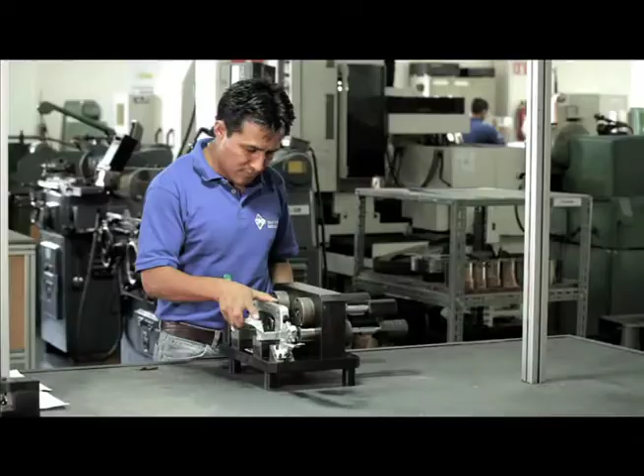Quality, service, experience, technology, flexibility, commitment. These are the values that define CPQ.

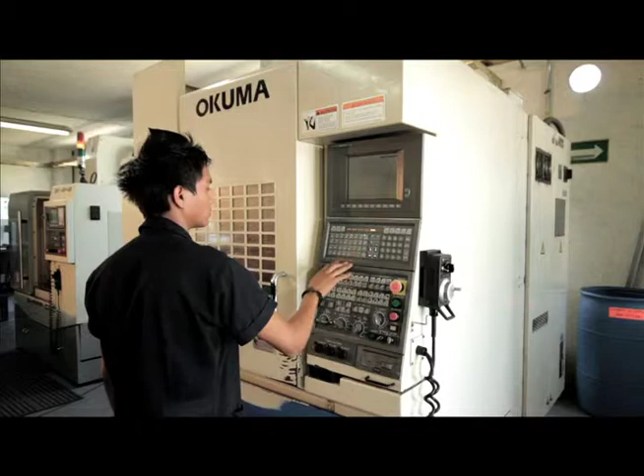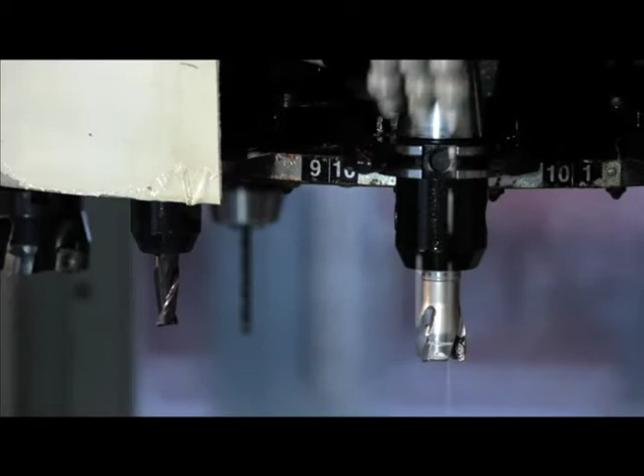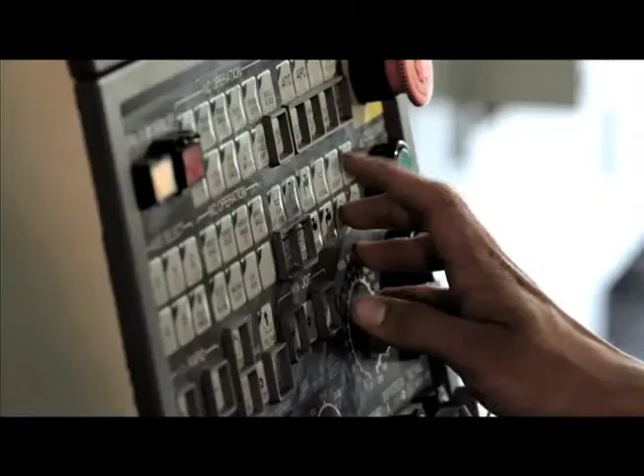CPQ is specialized in high-precision machining for 40 years and offers manufacturing of checking fixtures, holding fixtures, and go/no-go gauges right here in Mexico. With manufacturing and measurement equipment of the highest tolerance, CPQ offers manufacturing solutions, modification, and unprecedented refurbishing of measurement devices for the following industries: automotive, aeronautical and aerospace, pharmaceutical, plastic injection, foundry, molds, stamping, and many more.

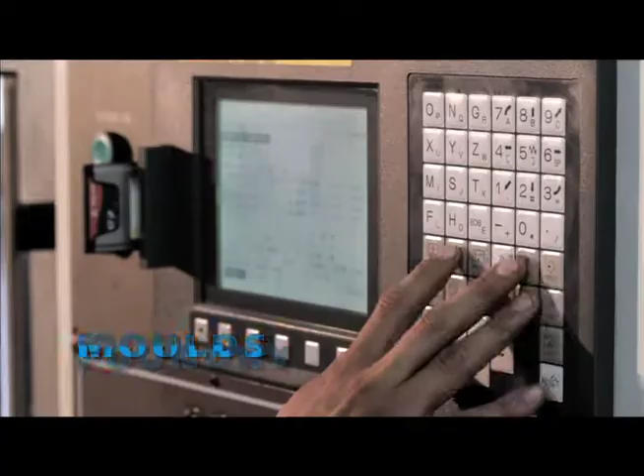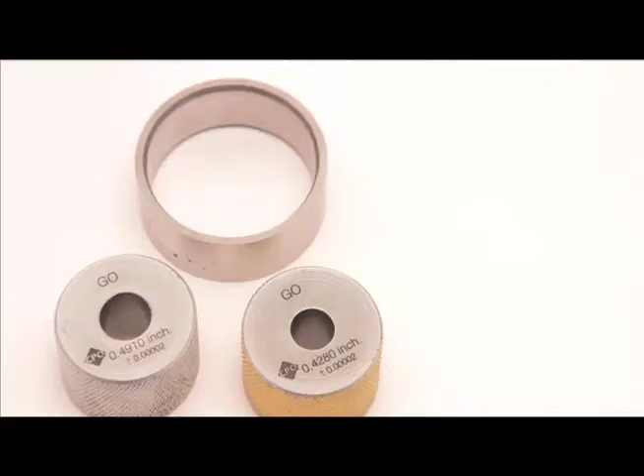At CPQ, using German technology, we specialize in the manufacturing and recovery of measurement equipment for the verification of geometric tolerances in checking fixtures using attribute and/or variables measurements, pin and ring go/no-go gauges, master gauges, fork, slot, and thread gauges, flush pins, height gauges, etc.

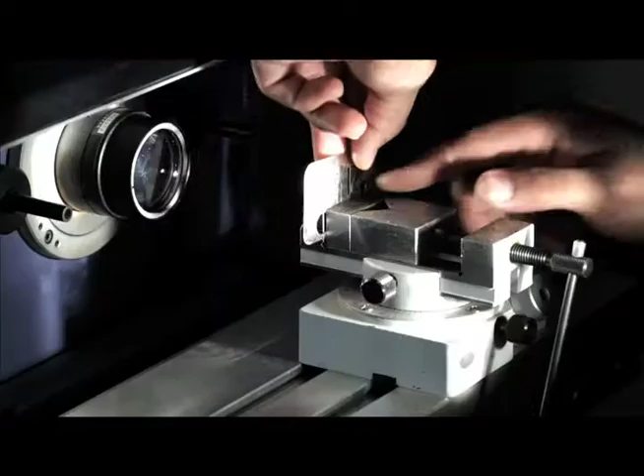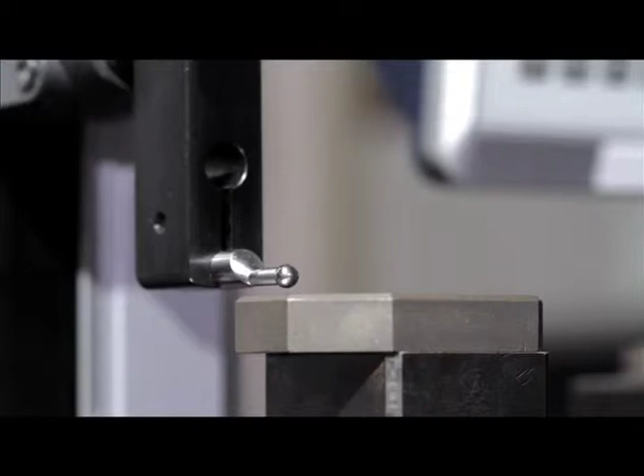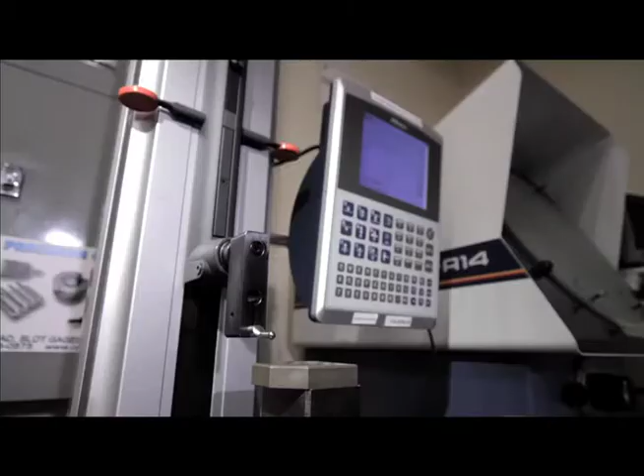The benefits of verifying geometric tolerances using dedicated measuring devices are reliability and speedy measurements, reproducibility and repeatability, independent of the evaluator, robust Poka yoke concept, verification and immediate on-site correction, and they allow freeing time of coordinate measuring machines for other projects.

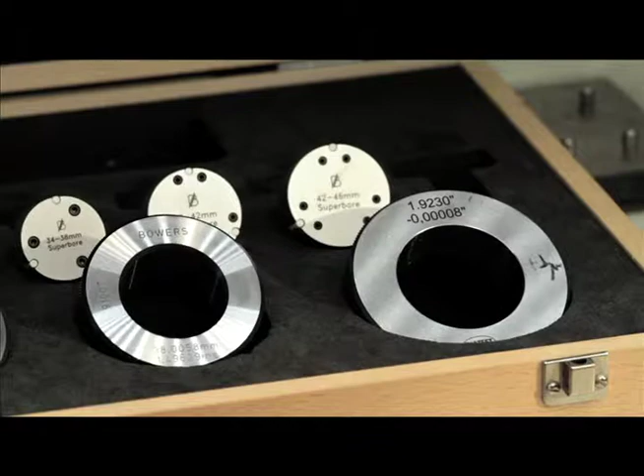The accuracy and dependability of our measurement equipment is possible thanks to the devices, tools, and gauges that are manufactured using hardened steels with ultra-hardness coatings such as hard chromium, carbonitrides, and titanium carbides to suit the application and needs of our customers.

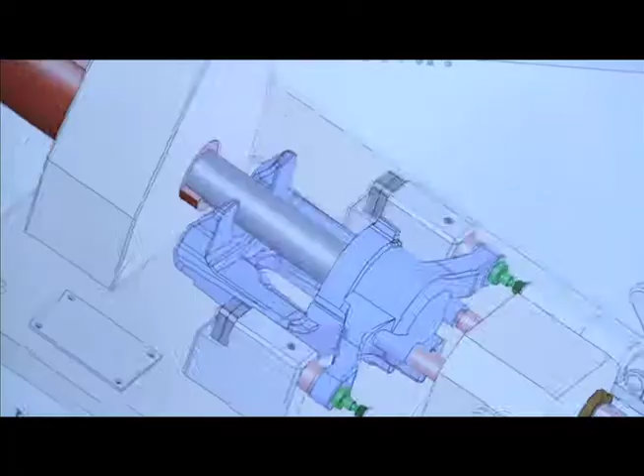The recovery or refurbishing of measurement devices and gauges in general is another specialty of CPQ. Our engineering group provides support and advice on how to restore dimensional tolerances to bring back usage and operability to your measuring devices and checking fixtures, giving new value and better use of these resources.

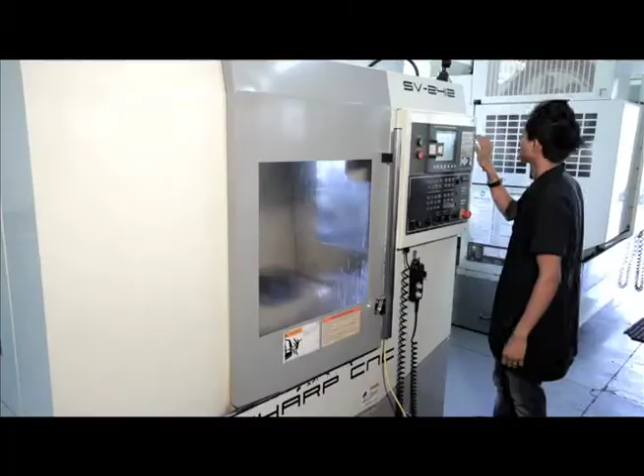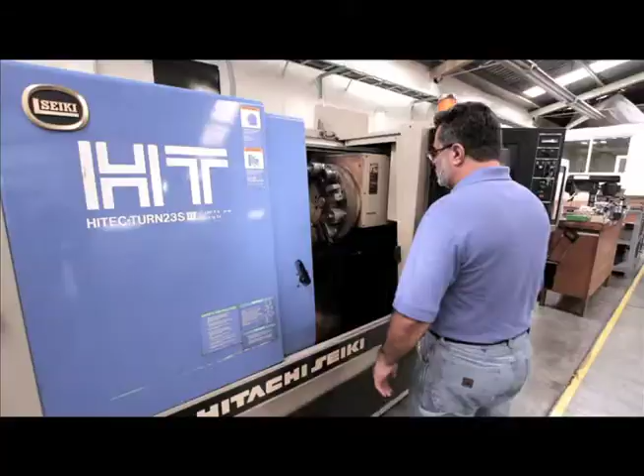With CPQ's unrivaled experience in cylindrical grinding, surface grinding, CNC milling, honing, lapping, wire cutting, and hard chromium application, we guarantee the successful delivery of your gauges, measuring devices, and checking fixtures in time and on budget.

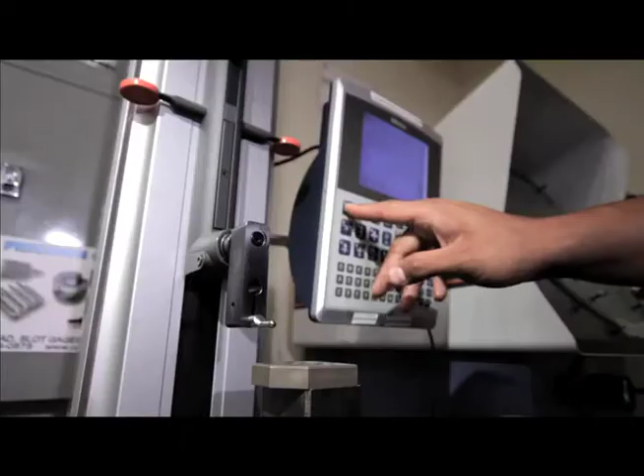Our commitment to innovation continues, aiming to always provide modern, efficient, and cutting-edge solutions. We invite you to know what we have planned for the future, incorporating automation solutions and pneumatic measuring devices to make your checking fixtures more dynamic, efficient, and intelligent.

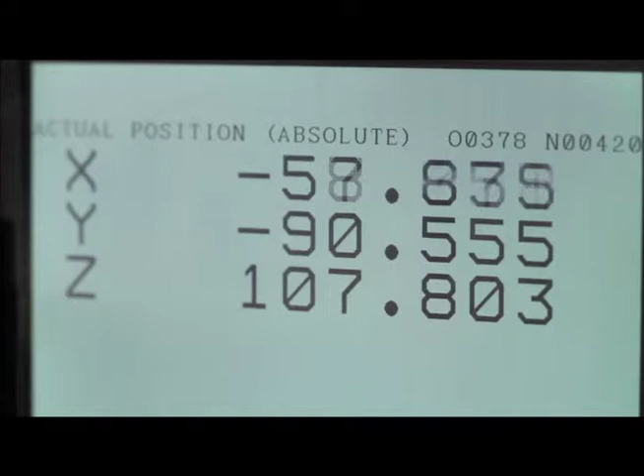In CPQ, we work hard every day to create the ultimate precision measurement equipment with a firm commitment of providing you the best checking fixtures and go/no-go gauges available today, with the recognition of more than 600 customers in 15 countries. We are CPQ, a company passionate for the accuracy in dimensions and tolerances, committed to the quality of your business.